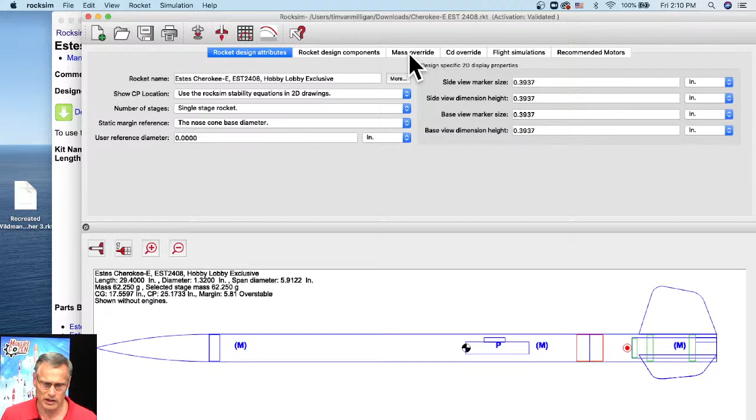So I'm looking at the rocket, right down here is the mass, 62.25 grams. So Robert, here's the easy way to do it. There's actually multiple ways of doing it. The easiest way is come up here to mass override at the top of the screen. Just click on that tab, and right here there's a little checkbox that says use the values shown below for all the simulations. And you'll notice that the units here are grams. So you can come right here and put in 109 grams. But when you do that, you also need to put in the center of gravity location.

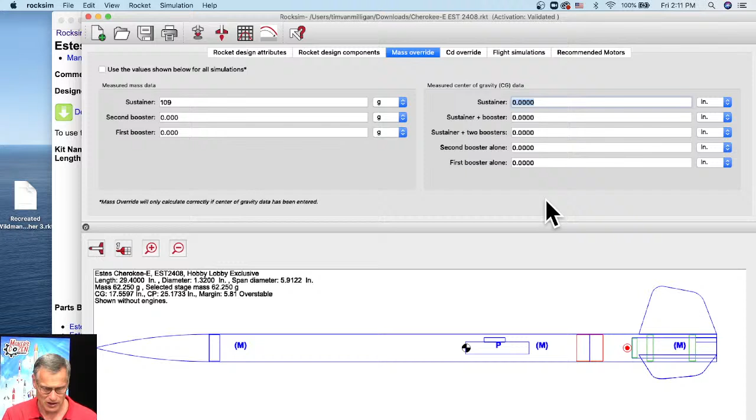Now the center of gravity, let me go here. As you know, when you balance a rocket, where it balances is the center of gravity. So you need to know the position of the center of gravity from the tip of the nose cone to where it balances, right there. And then once you have that number, then you go into RockSim and you put that number right here for the sustainer. So I don't know where your Cherokee E balances. Right now, at 62.25 grams, it balances right here, which is 17.5597. So I'm just going to put that in because that's kind of like the best guess that I have. 17.5597 inches from the tip of the nose cone.

So when I check this box, you'll see the weight will change, but the position of the center of gravity is not going to change because I've specified it at that location. So when you do this, do it without the rocket motor in the back end. Because when we put the rocket motor into RockSim, it's going to put weight in the back, and so it's going to move the center of gravity back. So when you're doing the mass override, like I said, do it without the engine installed.

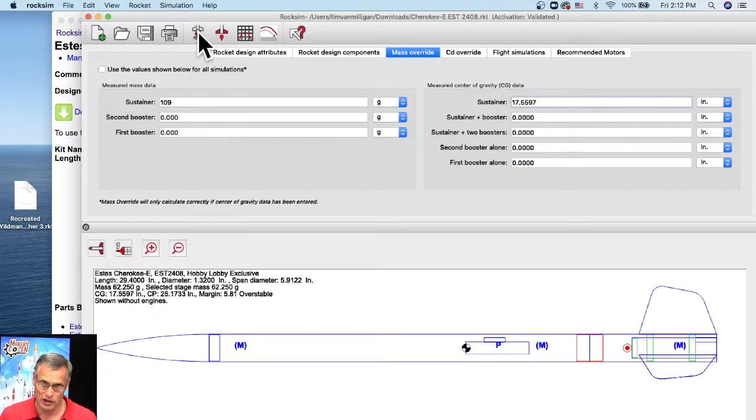So if there's an engine in the back and it's showing up, and you'd probably notice it, then go up here to prepare for launch, and then you'll see the little box that says clear or clear all. If you check on those, it will pull the engine out of the rocket. So, okay, I'm going to check this box right here, and we'll see what happens.

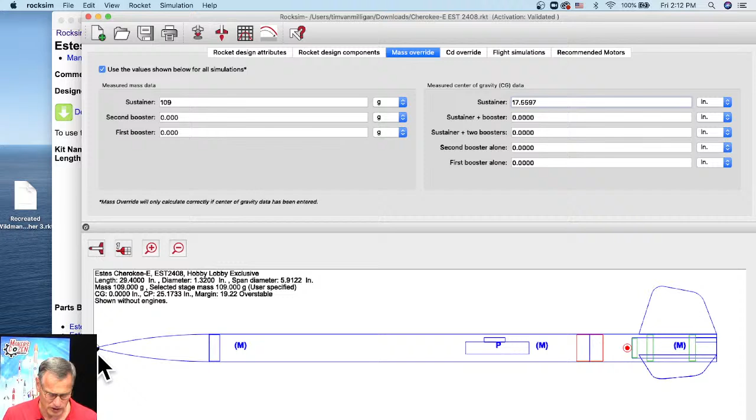Bam! Oops, what happened here? Because it shifted the CG all the way to the tip of the nose right here, which is behind my head on the screen. Can't see it, but there it is. I don't think I hit the tab key over here. So yeah, you've got to hit that tab key so it takes that number. And so then I put it back to where it should be. So that's the easiest way, okay?

Another easy way to do it that I think I might prefer if I was doing it myself. Okay, so I'm going to uncheck this, and so I'm back to where I started. So I'm 62.25 grams. So what you can do is add a mass object into the rocket to account for the extra weight.

So what is the extra weight? Let me get a calculator here. So you said 109 grams. So I'm going to take 109 grams minus this number right here, 62.25, equals 46.75 grams. So I'm going to create a mass object, and I'm going to put it in the rocket at 46.75 grams. So to do that, you can come to Design Components.

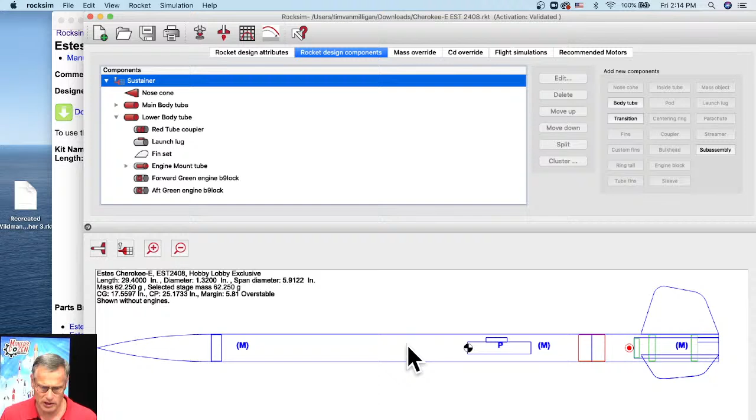First you have to decide where you want to put it in the rocket, and I think I want to put it in this tube, so I'm just going to click on the tube. There's another tube down here, but I'm going to click on this tube, and it highlights it up here. So once this is highlighted like this, then I can add that mass object. So I click on that, and what it does first is bring up the database of all the mass objects that it has, but we don't really care about that. So we're going to cancel out of the database, and then we're going to be right here.

So it was 46.75 grams, and then we need to specify a location. Right now it's at 0 inches from the front of the owning part. And remember, the owning part was this body tube right here. So it put it right there. There's my new mass object. But notice what that does. It moves the center of gravity, which used to be way back here, all the way up to here.

So now what you do is you slide this mass object around using the slider bar until your center of gravity is in the right location. And again, do this without an engine installed in the back. And I don't remember what we had before, but I think it was somewhere around 17 something inches. So I'll just leave it right there and click OK. And now look right here, our mass is 109 grams. We have that extra mass right here.

And I might change the name of this mass. So I just double clicked on it to open the screen. And I'm going to change the name to paint mass, because you never know what the paint mass is. That's a lot of paint, 46 grams. Paint and other unassigned mass. Okay, you know, it could be little bits of something. Maybe you have clay in the nose, or who knows, extra epoxy somewhere. So that is how I would quickly change the mass of the rocket.

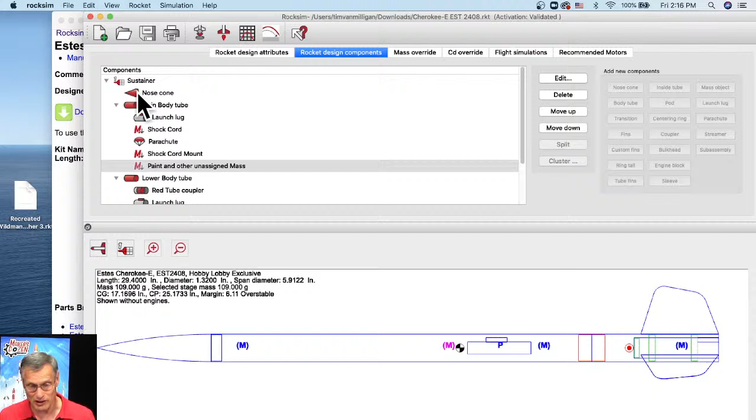Now, if you wanted to be really, really accurate, what you do is, now you've got your rocket built, you take each component and you weigh it. And then instead of doing one mass for the entire rocket, you go and adjust the weight of each component. That's a little bit harder and a lot more work, because look at all the components we have.

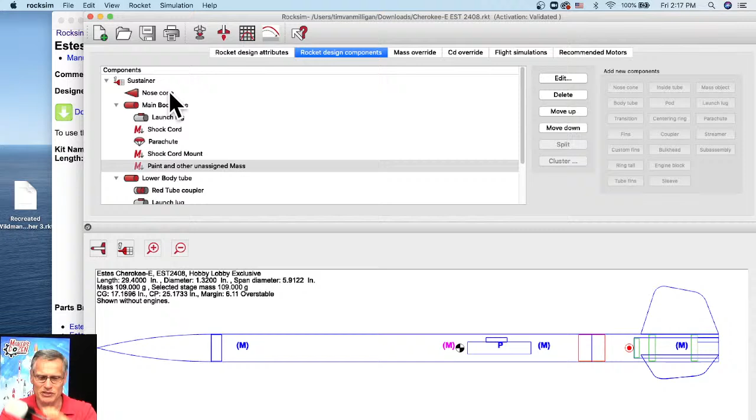So you'd have to weigh every one of these, and you also need to get the center of gravity of each of the components. So you have to balance it on your finger and then measure from the tip or the front of that part to where it balances. So like on the nose cone, if I open that up, I can come here to mass override on the nose cone, and it says use the mass and CG information below.

This one I was already using the mass override on. So I had put the center of gravity at just under 3 inches from the tip. So that's really far forward on this nose cone, this nose cone here in the Cherokee E. But in real life, you would do that for every component. And the reason you might want to do that is it makes the trajectory a little bit more accurate.

You probably might not notice it, but if you are really picky, you might want to do it that way. Because what it does is it changes what's called the moment of inertia. The moment of inertia is a property of the rocket that tells you how resistant it is to rotation. And the higher the moment of inertia, the more it doesn't want to rotate. And so when it's flying, it doesn't want to rotate as much.

And so we want to match that with an actual number, and RockSim will calculate it automatically, but it needs to know the distribution of mass along the entire length of the rocket. But if you just want to do the quick and dirty, like I said, just do the mass override or just put a mass into the rocket. The important part is making sure that center of gravity is in the right spot. Your moment of inertia might be a little bit off, but it won't be too bad as long as your center of gravity matches the real rocket.

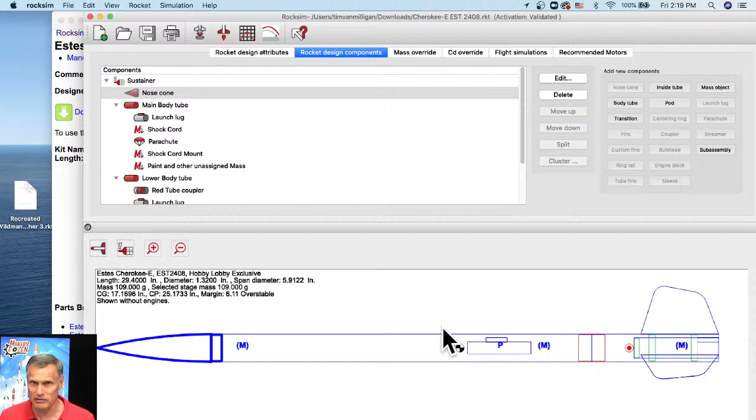Julie Kaufman says, my PC desktop died and not sure how to get RockSim to reload. Can I get it from Apogee? And the answer, Julie, is yes. Let me go to the Apogee website again, ApogeeRockets.com. So what you can do, Julie, is you can either download the free trial, or you can download RockSim from the link that we gave you when you bought it originally. Both of them are the exact same version of RockSim. So if you don't have the email with the original link, don't worry.

Just go to How-To and Guides, come down to Software, and RockSim free trial. You'll enter your name and email. You'll select Windows or Mac. I think you said your PC, so I assume it's Windows. And then hit send now, and we'll send you a new link to download it. So then download it, but then you still have to activate it.

And to activate it, Julie, you go to the Apogee website, and then you have to log in to your account. So if you've purchased from Apogee Components, you'll typically have an account. So up here at the top, you can create an account or log in. If you already have RockSim, you probably have an account, unless it's been a really long time. So you'll come here to log in, and if you can't remember your password, down here you can reset your password, and then you'll sign in, and then you can come here to the account menu.

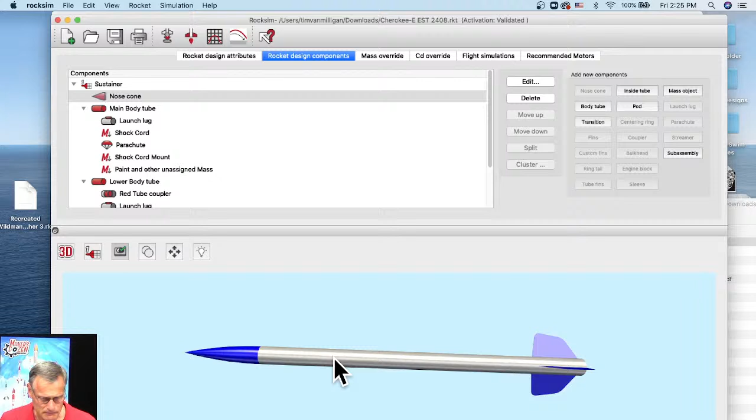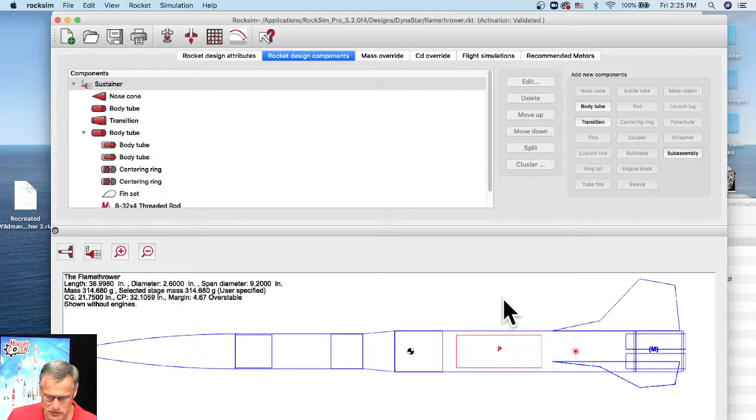Okay, so let's go to the Apogee Flamethrower. So I'm going to File, Open up here at the top. And I want to go Flame. Man, all of a sudden my computer's slowing down. Flamethrower. And I am looking for a Flamethrower rocket. I'll open that. Do I want to save that one? No. Okay, so here's the Apogee Flamethrower. Let me get it in 3D. Oh, this version is ugly looking. It's not yellow. It's olive drab and blue.

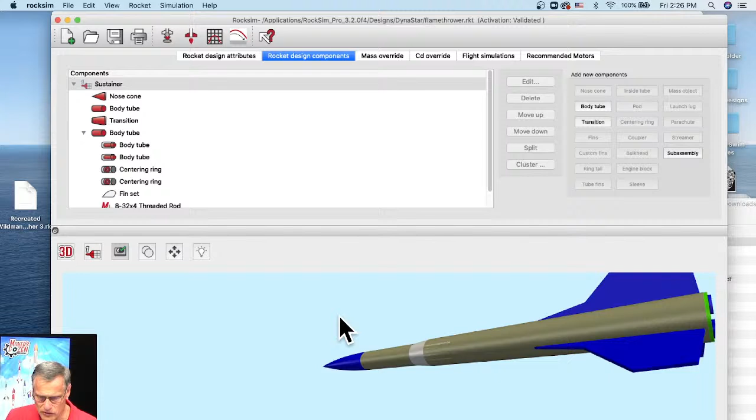So this one has a 2-engine cluster in the back. And so he's wondering, how do you do recommended motors? Typically, when we upgraded RockSim from version 9 to 10, we added a really cool feature called recommend motors. To use it, you just come up here to the top, to the prepare for launch button, click on that, and right down here there's a button called recommend motors. But you can see right now it's grayed out. You know, like these are active buttons, this one's grayed out

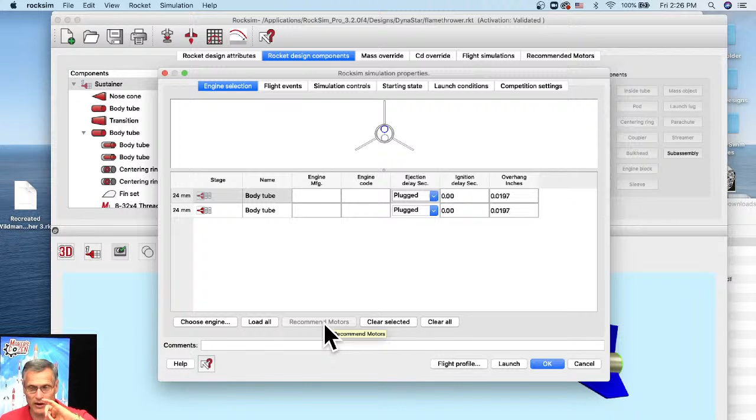because normally what it does when you click on it, it will run a simulation for every rocket motor that will fit that engine mount. So yesterday we did a rocket that had a 24 millimeter engine mount. How many different rocket motors, not different delays, but how many individual rocket motors do you think are available in 24 millimeter?

If you want a hint, go to the Apogee website, go to Shop, come down to Rocket Motors, go to 24 millimeter rocket motors, and you'll see displaying 1 to 10 of 68. There are 68 different 24 millimeter motors. Now, some of these are bulk packs. So of the 68, when we ran it yesterday, there were 53 different rocket motors that are 24 millimeters in diameter. So that's just for one engine mount.

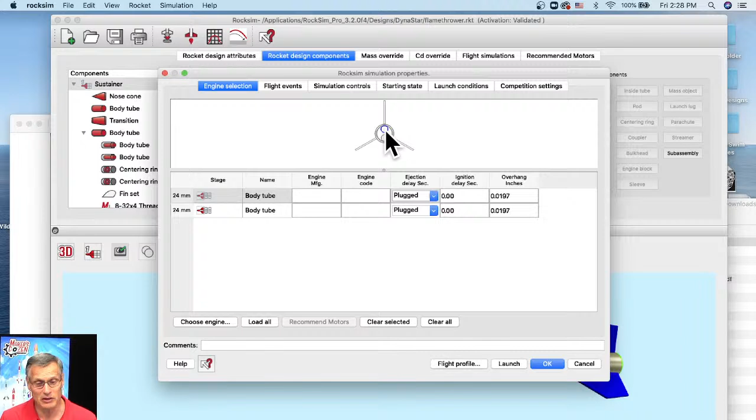Now, when you got 2 engine mounts, how many different combinations of rocket motors can fit that? And I think the answer is you double it. But when you get to 3 motors, now you got a problem, because now it's important which motor is in which tube. So here, looking at the back of the rocket, I got 2 engine mounts. And I could put a D12 in one of them and a C11 in the other one. Or I could put a C11 in this one and a D12 in that one.

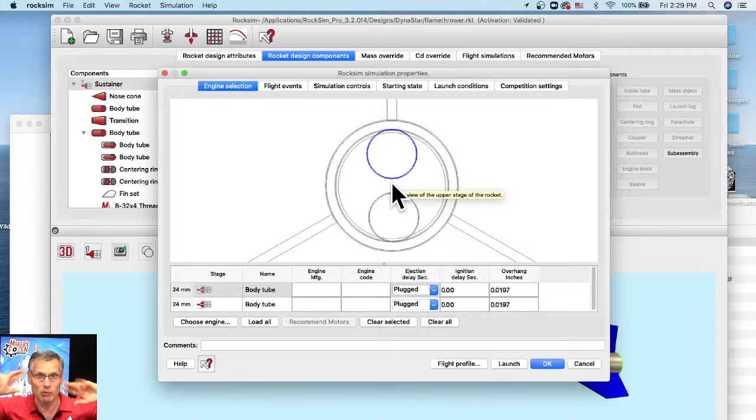So now instead of being 53, you were at 106, but I think that we just doubled it again to 212. So the combinations just go astronomical really fast with the number of motors and the number of engine tubes. So if you had a 3-engine mount, the combination of where motors can go in those is just too crazy.

So we made a decision to only allow the recommended motors to be used on rockets that have a single engine mount in them. And that includes single stage rockets. So it won't work on multiple stage rockets.

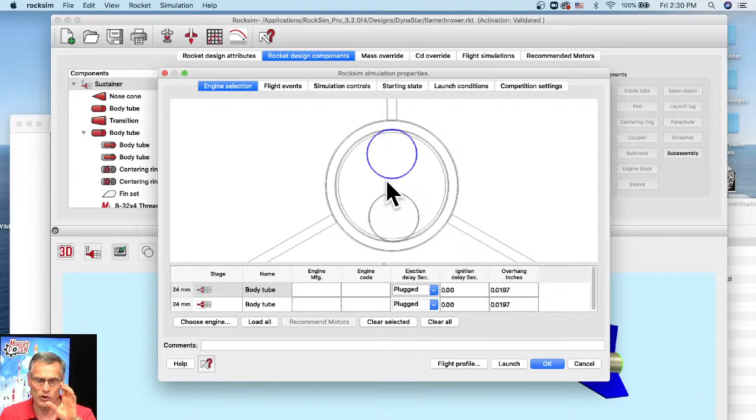If you have a multiple stage rocket and you want to check engines, basically what you have to do is take your RockSim file and delete completely the lower stages, so you only have the upper stage. And so you can run simulations, recommended motors on the upper stage, but not the lower stage. But if you have a 2-engine cluster, that's not going to work.

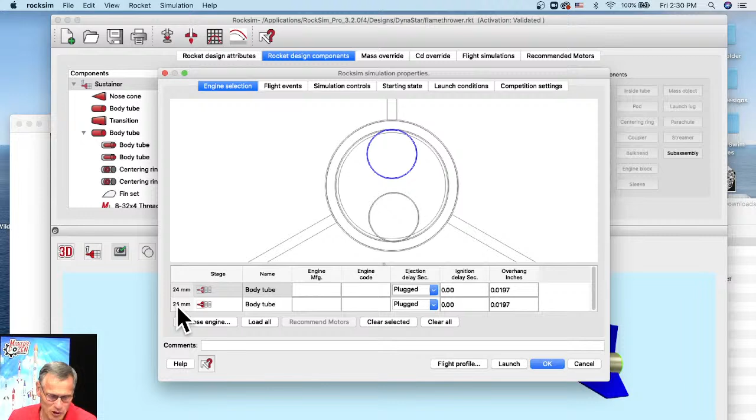So how would we do this? And the answer is it's just brute force. This one has a 24mm motor mount. So I have to just kind of start with a guess. So basically what I would recommend,

who asked this question? Vernon. What I would recommend, Vernon, is to go look at the list of rocket motors, like on the Apogee website, and then go through your range box and see what motors you already have in there. And then you might want to say, well, I like a White Lightning motor.

So here's an E18W, and the W stands for white. It has a white propellant. The T stands for Blue Thunder, so this one has a blue flame. The J is for Black Max or Black Jack, so that has a smoky flame. So you can kind of start with what you prefer. So say, for example, I like that white. So I could say E18W.

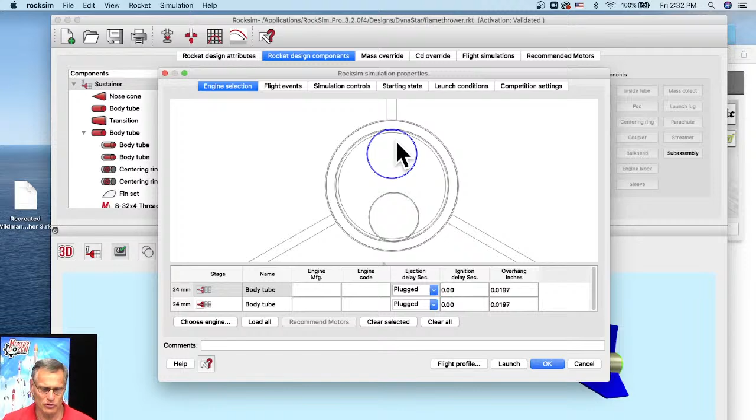So then I would come back into RockSim and go to selecting a motor, so choose engine. I'm going to change my diameter filter from show all engines to show only those that match the motor mount diameter. And it's showing me what the motor mount diameter is here, 24mm. And then under manufacturer filter, I'm going to show just the Aerotech motors. And then I'm going to go look for that E18W.

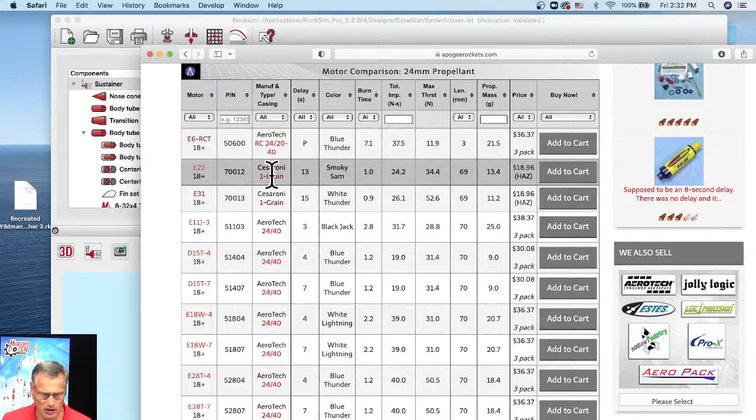And there's also an E20W right here. So I could pick either one. They're both pretty close. One might be a reload. Let me check. The E18W is a reload. So if you wanted single use, you'd have to look in this column right here for single use. See where it says single use, like here under Quest.

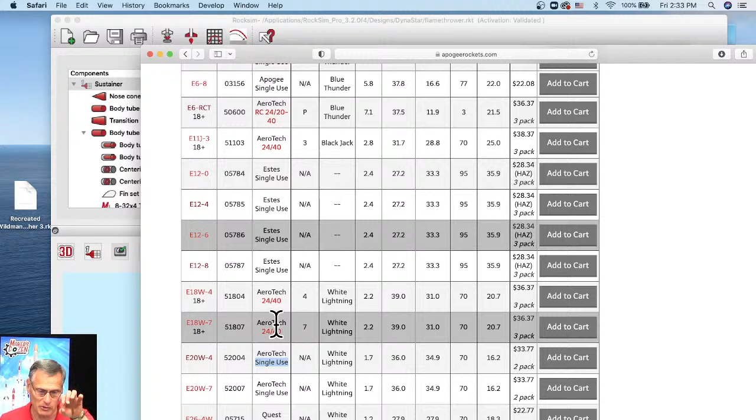Let me sort these. So to sort this list, just click on the column. Okay, so now they're sorted from smallest motor to highest motor, so I can go down here to the E's. So there's that E18, and here's the E20. So the E20 is a single use, where the E18 is a reload, because this is the nomenclature for the Aerotech reload. It's a 24mm diameter case, and 40 Newton seconds of total impulse that it will hold.

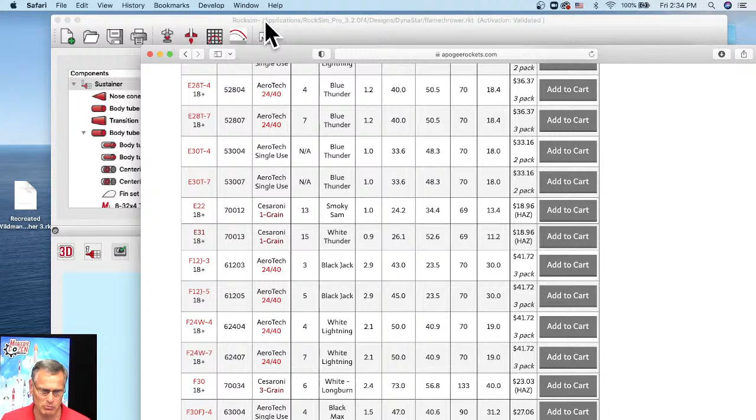Basically, if you see that configuration, 24-40 or 24-60, it's a reload case. Under Cesaroni it will say 1 grain, 2 grain. See right here, this is 3 grain. So that tells me that's a reload also. But if you prefer single use, in this particular case I might prefer a single use motor. So under type filter, I can say single use. And there's that E20. So now my choices have gone from 53 down to 6.

So now I can say, okay, let's load an E20. I always pick the longest delay available. Click OK. And so now one motor is loaded, and then I need to load the other one. And so now you have a choice. Do you want another E20? Probably you do, because you don't want to have unbalanced thrust.

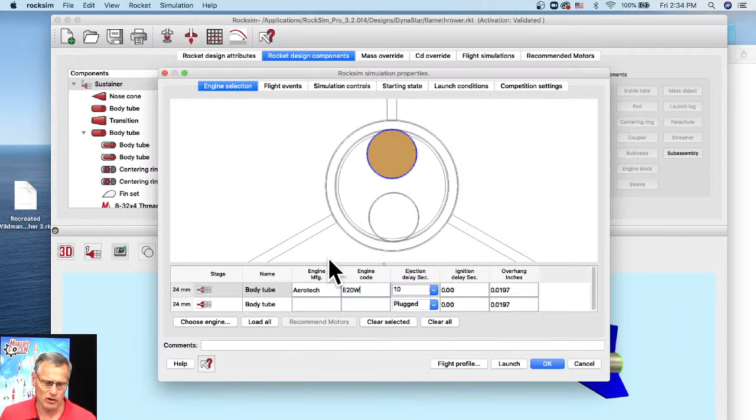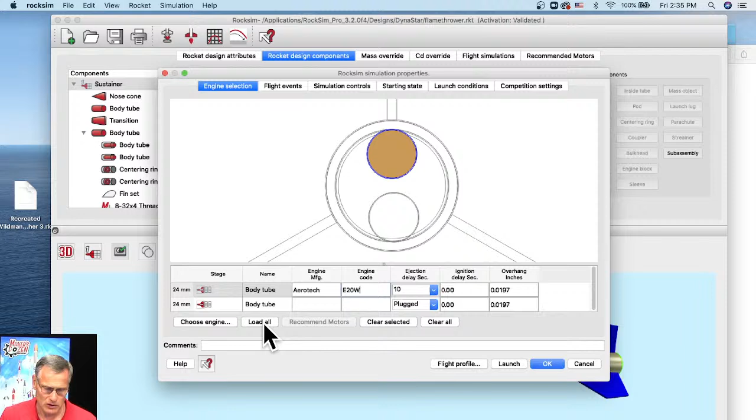To load that other motor really quick, you just click down here, the load all button. That load all button will load the motor that you highlighted into all the motor tubes that are the same diameter. So if there was an 18mm tube along with these two 24s, it's only going to load in the 24s. It's not going to load that E20 into an 18 because it doesn't fit. So I'm going to hit load all, and then it loads it. And then you're just ready to run your simulation.

So I'm going to hit flight profile. Let me check my launch conditions here, so I got an 8-mile-an-hour wind, and I got a 36-inch launch rod launching straight up. And then hit the flight profile, and it will run the simulation. And you can see it's gone pretty high. It went well over 1,000 feet, 1,710 feet. And now it's loading the 2D flight profile. Here's my rocket sitting down here, and we can see an animation of the flight.

And click on play. You can see the rocket's taking off and it's going up. It's arcing over a little bit, but not too much. It's still within our weathercocking cone. We want the rocket's peak altitude point in the middle of this cone somewhere. We call this cone right here the weathercocking cone. And as long as the peak point is inside the cone, that's a good sign. That's a really good sign.

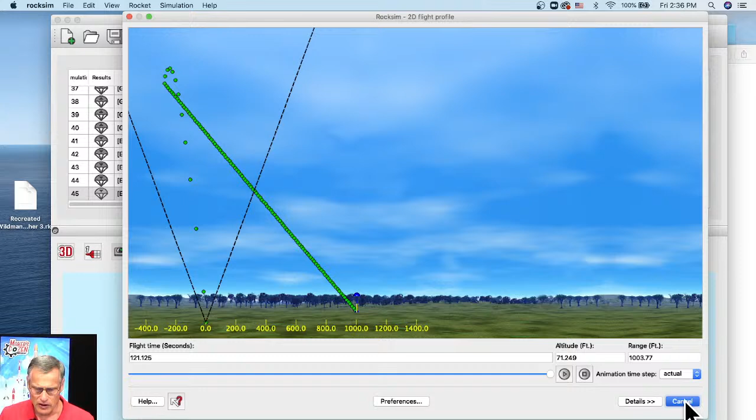And so now the parachute is out and it's coming down, and I'm just going to bring it down all the way to the ground, and it drifted 1,003 feet. That was a pretty good flight. So that particular combination, 2 E20s, is a good flight.

And then you come here to RockSim and it says, okay, make it a 7.61 delay. So now when you go to buy your motors, I'm looking for an E20 dash somewhere around a 7. So come back here to the chart at the Apogee website, go back up to the E20. And the E20, I got two choices: an E20-4 or an E20-7. So I would pick that one. And then, okay, so that one works.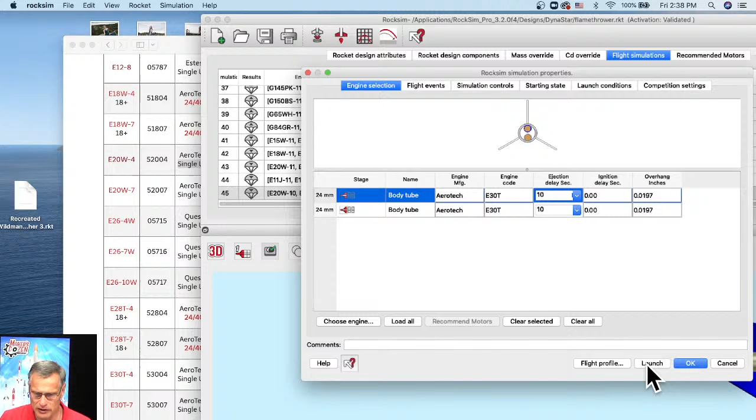So we have an E30 in one and an E20 in the other, and I'm gonna load that one into both motors. So now they're both loaded, and click launch. And this time I'm not running a flight profile. I'm just running the simulation because I know it's going pretty good. And it went a little higher, 1,900 feet versus 1,710. And this time it recommended the 8-second delay.

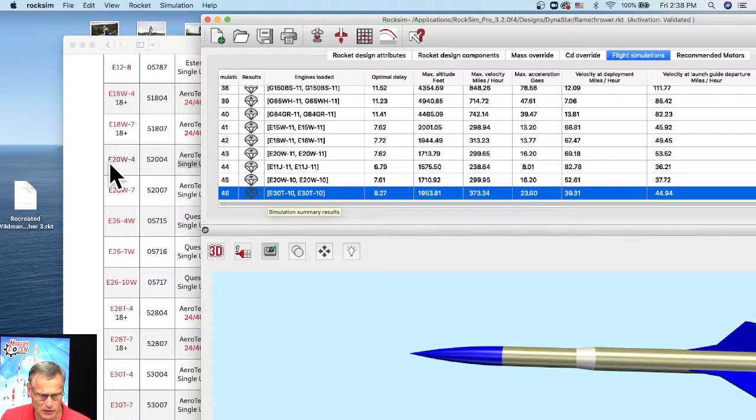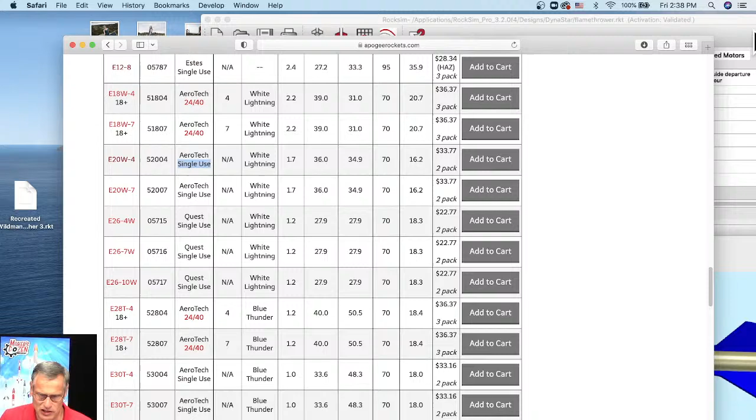So if I was on E30, I would come down here, and again, I only have a choice between an E30-7 or an E30-4. And again, I'd probably choose the E30-7. So what's going to happen is it's going to be deploying on the way up, because it wants an 8-second delay. So I would rerun that simulation, prepare for launch. Now this time choose the 7-second delay. Come on. 7-second delay. Load all. Now they're both 7 seconds.

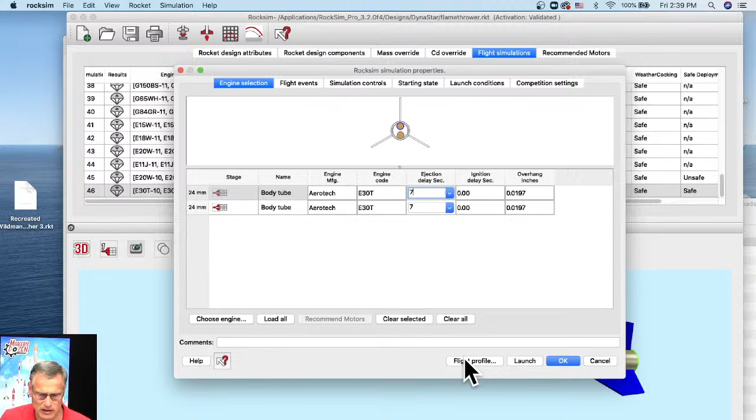And this time I'm going to look at the flight profile because this one is going to be deploying on the way up. I want to see how fast it looks like it's deploying when that parachute comes out. So the rocket takes off, it's going up, and it's slowing down, but it's still moving pretty good. Okay, so you see it still had some upward velocity when that parachute came out.

And so that's concerning. So we want to check one more thing there, and that's the speed at deployment. And there's a column in RockSim where you can look at that velocity at deployment, miles per hour. We're at 31.85. So it was still moving upwards at 31.85 miles per hour when the parachute came out. So now you have a question: can my parachute handle being deployed at 31.85 miles per hour? And that's a good question. We like to be under 50 miles per hour. So we're under 50 miles per hour here.

But if you're using a plastic parachute versus a nylon parachute, nylon parachutes are much more durable than a plastic one. So if you're using a plastic one, you might want to say, well, is my parachute going to be coming out a little bit too fast? And if it is, you might want to not use that motor. So this is where it takes a little bit of human consideration. You know, this is engineering. This is exactly what engineers do.

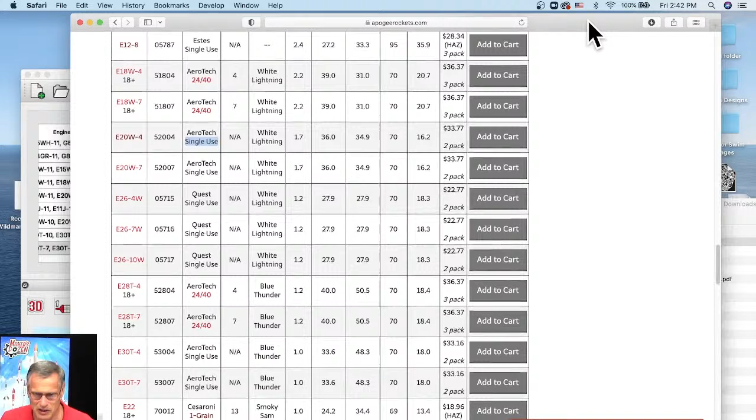Rick DeFossa says, New Hampshire, checking in. Thank you, Rick, for showing up.

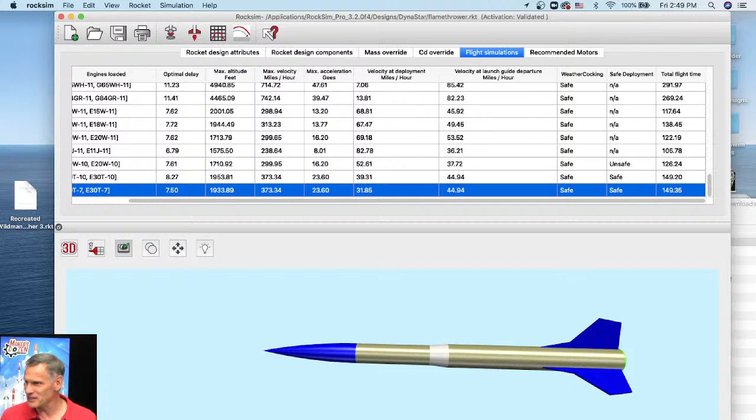Art Applewhite from Texas says, howdy. Cool. Art, we're going to be in Texas next summer for the World Space Modeling Championships. So I'm sure you will be there.

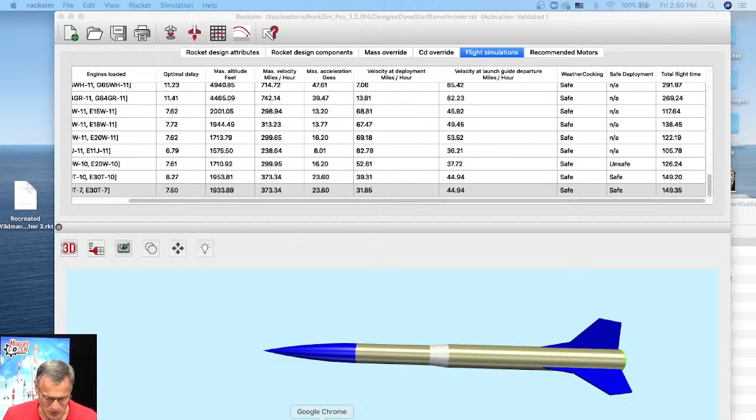What would be fun, let's do an asymmetric thrust design and see what happens. So I am going to open RockSim Launch Visualizer. The launch visualizer is at rocksim.com. I'll wait for that. All right, so this is the launch visualizer, rocksim.com. You just log in. And I'm going to log in.

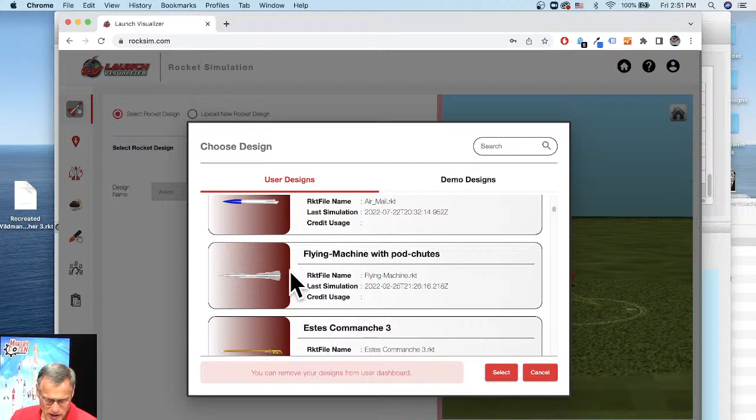And I'm going to see if I can find a cluster in my designs. I got a 3-stage. I got the flying machine. That's a cluster, so let's select that. Okay, so it loaded it, and you're going to see a picture of it on the pad. This one has 2 side pods plus a motor in the middle. So let's load this, but let's do an asymmetric thrust and see what happens.

So I'm going to come down here to select motor, and you can see our 3 motors. One of them is 24 millimeter and 2 of them are 18, and you can tell the location of this center motor because the red dot shows it's in the middle of the rocket, and these 18 millimeter ones are on the outside, so they're in the pods. But I don't know which pod is which until I fly it. But that's okay. So first we're going to choose a 24 millimeter motor.

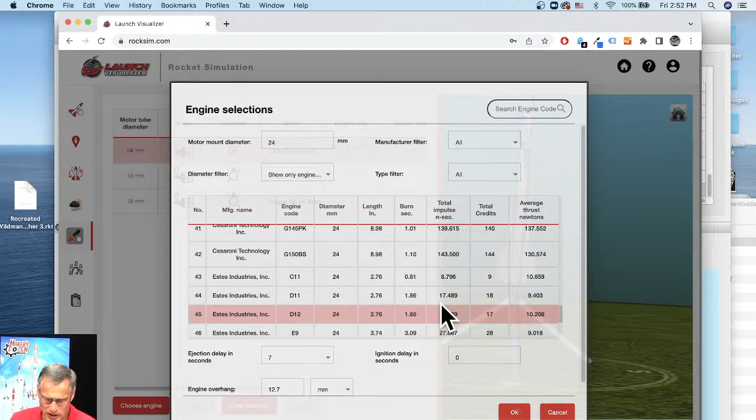Let's put in an Estes, like a D12. So I'm going down to the Estes motors. Here's a D12. Select the delay. I'll choose a 7-second delay. Click OK. So that one is loaded, and then the outer tubes, select it. You can double click on it and it'll bring up the engine selections. So let's put a low thrust motor in one and a high thrust in another.

So for the low thrust, what do we got available? We got an Aerotech D2.3. Now this is a reload, and reloads are plugged, so we'll leave the ejection delay. Well, we want it to fall off, so I'm going to give it a custom delay of 0 seconds. So when the motor burns out, that pod on the side can fall off. Click OK on that one, and then on this side we'll put a high thrust motor.

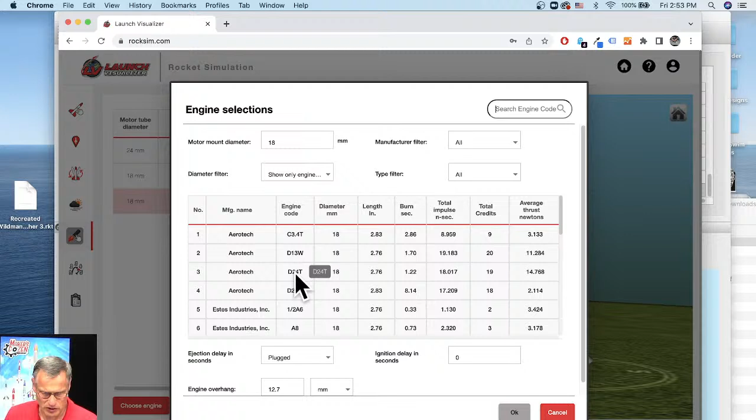So now we're looking for something that's really high thrust, and here's a D24. So you're asking, how do I know which is high thrust and which is low thrust? The number after the letter is the average thrust of the motor measured in newtons. Newtons is a measure of force, so the higher the number, the higher the average thrust. I'm just looking at which number's higher or lower. A 24 is a lot greater than 2.3. In fact, it's more than 10 times as great. So this is a high thrust motor.

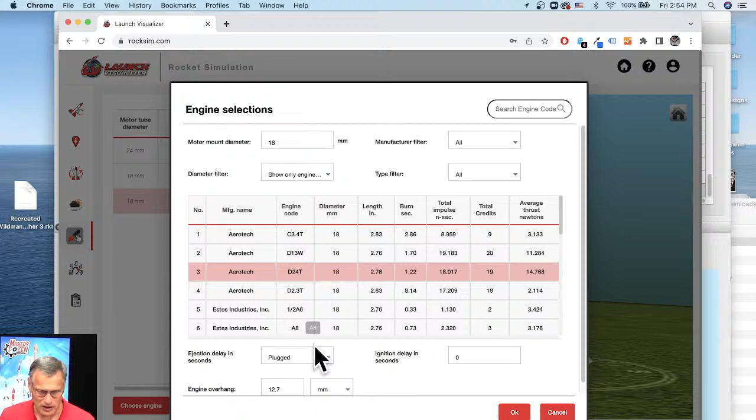And this one, I'll also do a custom delay and make it 0 seconds. Click OK. So now we have rocket motors loaded. Now we have to select our launch location. I'm just going down these tabs here, and we'll go through it real quick. Choose a launch site.

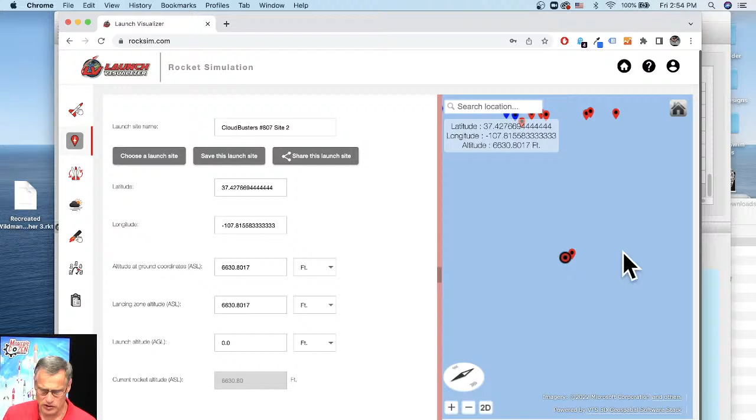Okay, I'm going to just choose one at random. I'll just choose that one. And what it's going to do is it's going to load that launch site right here so we can kind of get a lay of the land, you know, what our launch site looks like. And there it is. I'm in a parking lot of something.

So I'm going to move the launch pad a little bit. So this is an interactive 3D environment right here. And north is the black arrow. So north, I'm going to just swing it around. So north is pointing up. And then it looks like I got some nice launch pad area over here. So I'm going to put my launch pad right there. So I'm just double clicking on it and that puts the pad right there.

And then you have to confirm it. So I'm going to confirm that launch site right there. And when it confirms it, it brings over all the parameters of the launch site, its latitude and longitude and altitude above sea level right over here. So looking at this thing, I got some good launch area to the north, good launch area to the south. So I can aim either of those directions, but I probably won't go to the northeast.

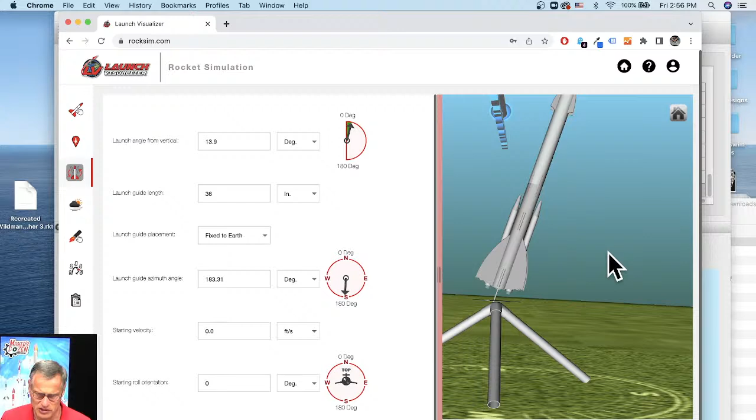So I need to know that because now I'm going to change the starting location. So I'm going to aim it, you know, 13 degrees, and let's aim it to the south. So I'm just grabbing the arrow and sliding it around. So now I'm going mostly to the south, and you can see my rocket on the pad. If I look down straight from up above, it's aimed mostly to the south, which is good.

Okay, so let's check the wind. We have a steady wind, and the wind velocity is about almost 5 miles an hour coming out of the west. You can see the direction of the wind and click OK. And then we need to launch. We already loaded the motors under flight events.

Oh, let's check that. The parachute that's in the middle of the rocket, we're going to eject that at maximum ejection delay, and that was a D12-7, so that's 7 seconds after the motor burns out, the parachute will come out. These pods, they have parachutes in them, and they will also pop out at the maximum ejection delay. I don't know if you can see my screen here. I need to make it a little bit smaller so you can see it.

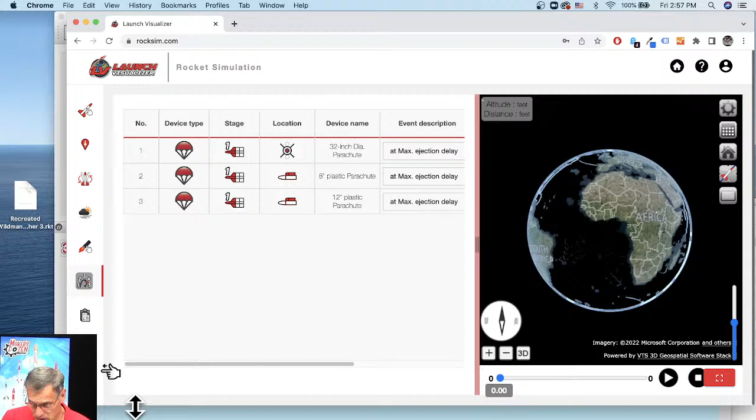Okay, so my launch button is underneath my head. It's right here. So when I'm ready to launch, I just click launch. And it's going to ask me to simulate, and it's going to use up that many credits. I'm going to say OK, simulate. And it's running the simulation in the cloud, which means it's on our servers somewhere in the world. And then it's going to load the rocket on the pad, and we should see our launch site in the background. It's kind of slow loading.

Okay, so now we're getting there. Now it's loading in the grass. So kind of getting the lay of the land here. We put it in the middle of the field, but north is kind of down and towards the right. So I'm going to swing it around, put north back up to the north so you're kind of oriented. You just grab this little compass wheel and spin it around. And this is fully 3D, so if I tilt it, now I'm looking off into the distance. Now I'm looking more down on it from above.

All right, so then to launch it, we just click this launch button over here to play the animation. And we'll see the rocket take off. And it looks like it's going mostly straight, even with off-axis thrust. The rocket's arcing over. And the parachute has now popped out. All right, so let's see that again.

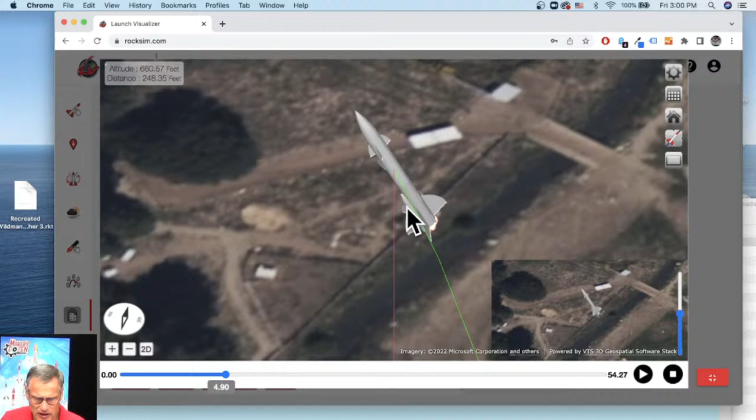Okay, I'm going to pause it right there, and let's take a look. Let's zoom in on it. So there's my rocket, and if I look at it, one of the pods is still attached, and if I swing it around, can I see the other side? One pod fell off, the other one is still attached.

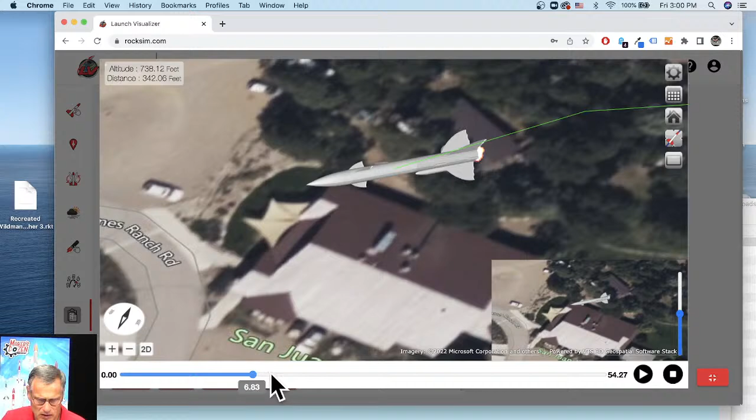Is that D3 still burning? I think it might be. Something is still burning on the back end of the rocket. So that must be that D3. Okay, so at that point, the parachute popped out because the rocket reoriented itself. I lost the rocket. I had to zoom out to find the rocket.

I'm looking at the ground. There's the ground track of the rocket. The launch pad was way over here. There's something landed right here. That was probably the first pod. The first pod fell off and then landed over here. Yeah, that's a pod.

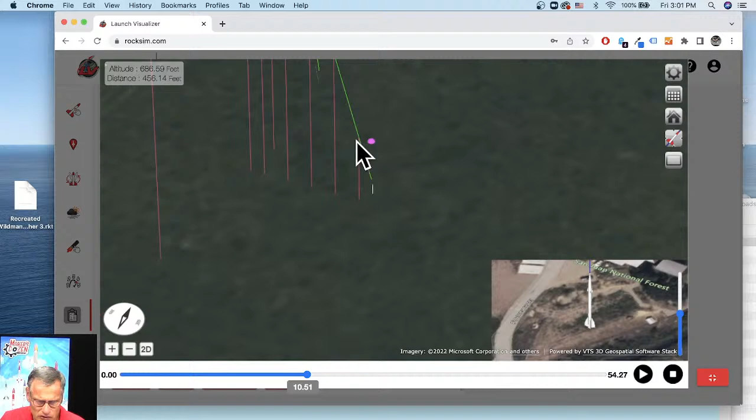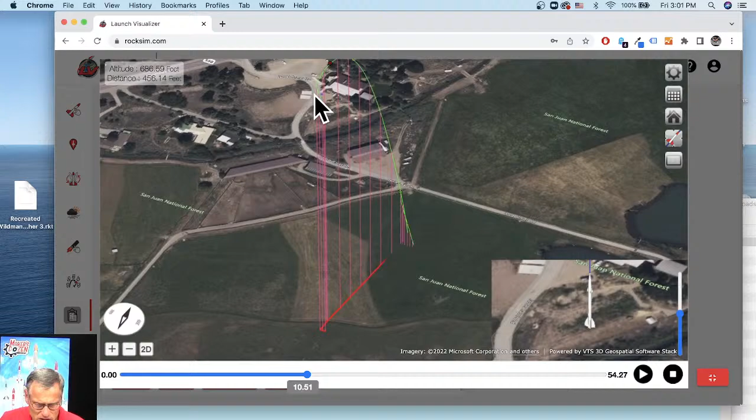So that green line here is the trajectory of the pod. It fell off the rocket right here when it was that point in the sky. And then the other one has now fallen off. So we should see a pod somewhere in the sky. And it's right there. That little line right there is actually the pod. Oops, I zoomed out too far.

Oh, okay. So that pod is falling off. Yeah, there's the pod. It's really jumpy. You can see that pod falling down. Okay. So that's how you run clusters and see if off-axis thrust is going to affect the flight. I would use RockSim Pro or the Launch Visualizer. It really helps to see things when you're in a cluster.

Oh man, we got a lot more comments now. Where did I leave off? Stan Anderson says, Johan de Sloper, wow. In feet, that's 2,300, wow.

Andrew says, can the rockets be customized for control and nav? I've watched a video by BPS, and he landed his rocket. Andrew, the quick answer is like you saw in the BPS video, it's really difficult. RockSim cannot do that. It cannot simulate a landing like that because we don't have control of the rocket in RockSim. In RockSim, once it leaves the pad, there's no control on it. The only control you have is selecting the delays or using electronics to pop out parachutes.